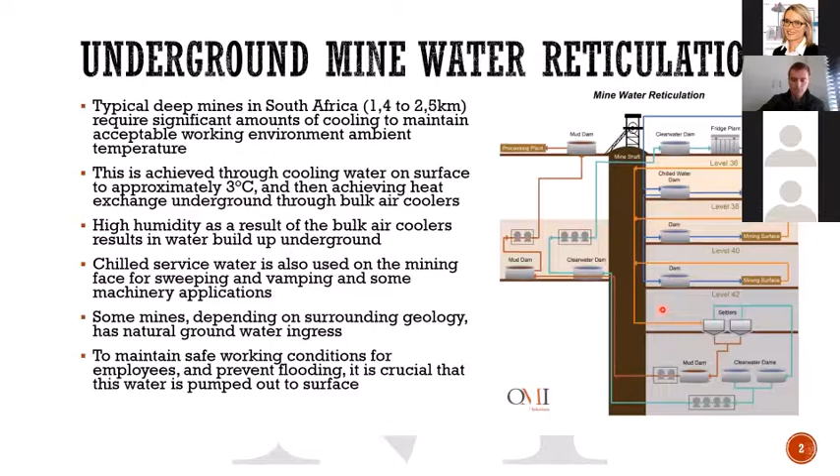And as you return from your mining face, your water is at a higher temperature, as I mentioned, but you also have a lot of solids entrained. The vamping and the sweeping of the face results in very fine solids from the blasting that get entrained in the water, and that also makes its way throughout the system. Now, the majority of these particles are less than 70 microns, so they are extremely fine, but they are from the ore itself, so it has a metal content and rock content, so it's very abrasive. And this needs to be removed from the water before it can be pumped out of a mine.

Now, whether you are just advancing or doing development work, the material you're blasting or drilling will typically be inert. But as soon as you start heading into the phase where you're mining the ore, there you can start encountering sulfide minerals, which actually have the ability to affect the chemistry of the water, and I'll talk to that in a bit more detail further on. When this water with the solids comes down to the bottom of the shaft, you typically have settlers underground, which act as a solid liquid separation. Your clear water then gets pumped to separate dams and then gets pumped out of the shaft.

This is just an illustration of the interstage pumping. Because we're talking about 1.5 to almost 3 kilometers, your pumps typically can't pump that amount of static head effectively in a single go. So you have this interstage pumping, which is another set of dams that you have to handle and maintain. Then your clear water goes back into the system that feeds your fridge plant, and this system continuously runs in a cycle and either gets topped up with fissure water or another water source.

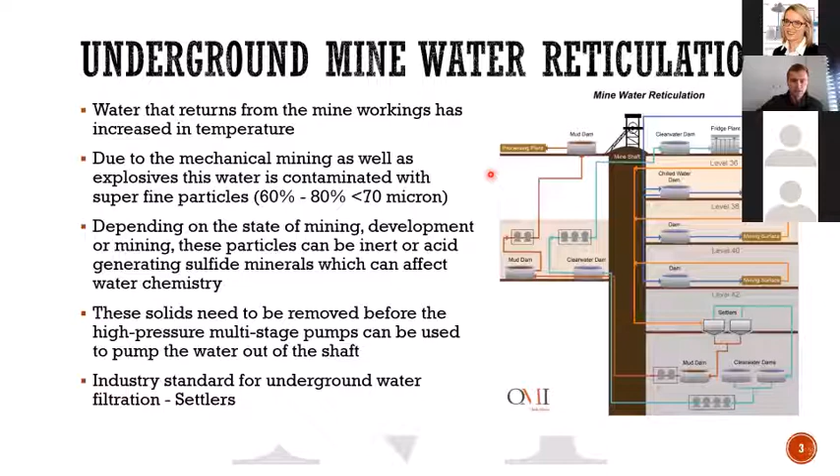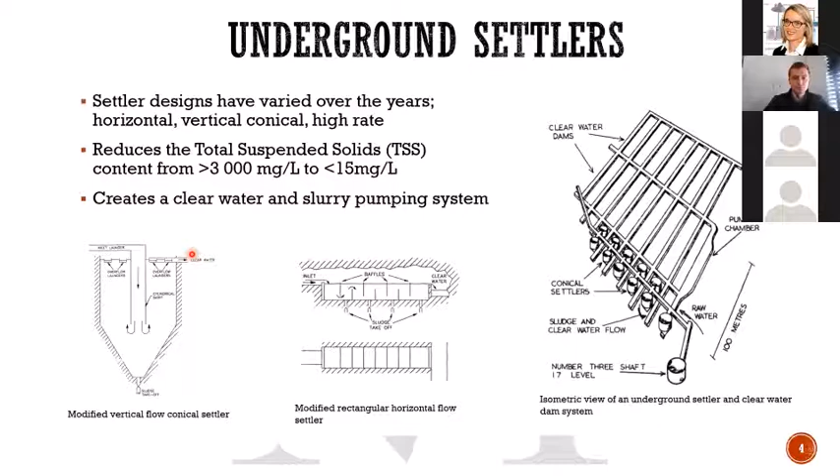So your settler operation is a very critical part of your water reticulation system in an underground mine, and they need to be taken care of, and your settler operators need to know what they're doing to make sure they operate optimally. Then just an illustration of the type of pumps we're talking about for your clear water systems.

As mentioned, they have to pump in excess of 1.5 kilometers, and the volumes can be anything from 300 to 600 cubes per hour, even higher in some cases. So it's really big machinery that's at work here, and they're expensive as well. So a lot of care needs to be taken when looking after these clear water pumps.

And because of this high pressure that they have to achieve, you have to make sure you protect them from the solids. The very fine impeller diameter clearances that they have make them sensitive to these solids. So that's why your settler performance is such an important part in preventing damage to these pumps. Any solids that enter these pumps can damage the impellers, and this will result in reduced efficiencies.

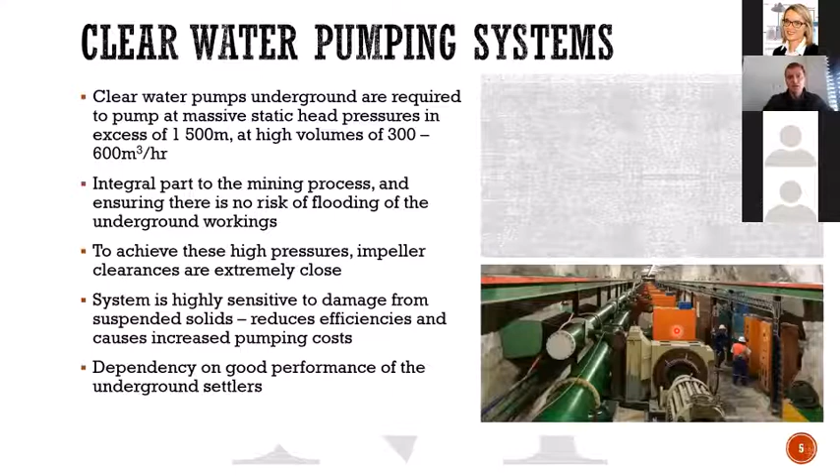And when you're talking about pumps of a few megawatts, any efficiency losses cause horrible extra costs in electricity usage. So you have to take that into account, and it's also important to monitor the efficiencies of these pumps continuously to be able to know when they're reaching the end of their effective lifespan.

So as I mentioned, there's a parallel system, a clear water pumping system and a slurry pumping system. So the underflow from your settlers gets referred to either as your mud or your slurry, which can have an SG of anything from 1.05 to 1.2. Obviously, you want your SG as high as you can feasibly pump, because the lower the SG is, the more the water content is. So that means you're just pumping more water that should have been reporting to your clear water system.

So yeah, as mentioned earlier, this is an extremely abrasive material that you're working with. So there's been a lot of optimization over the years on these mud water systems or slurry systems for them to be able to work efficiently in pumping these solids. Any operational staff will also know that your slurry pumping system is a very high maintenance portion.

So it's important to do your routine maintenance, and equally important to have your standby systems available, because if you have a failure of your mud pumping system, you can't switch over, you can't pump the solids in your clear water system. So if they stop, you have to stop the entire system. So on both sides, your clear water and your slurry water system need to have duty and standby units, because you can't stop your water pumping system at any time. Then you start re-watering some of your sections, and then eventually flooding becomes a risk.

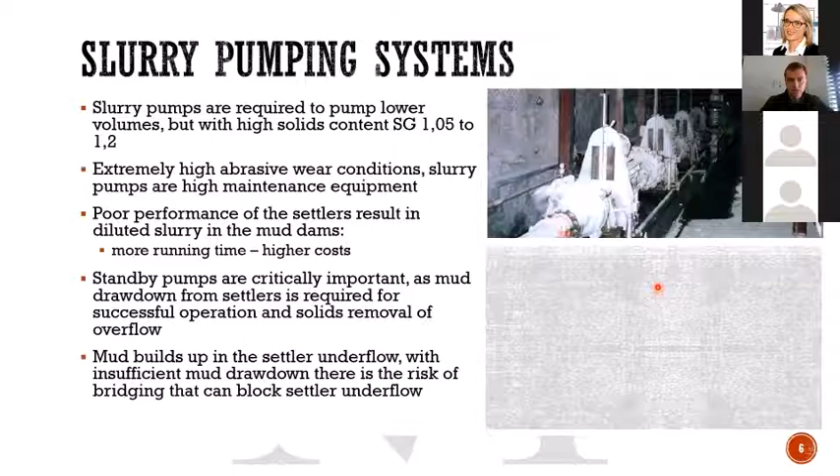So in some instances, the mud pumps are used for draining of your settlers. So they directly influence the performance of the settlers in some cases. If you can't drain the mud from your settler, your mud blanket builds up, and then eventually you start overflowing solids into your clear water, which is again exactly what you're trying to avoid. So as you can imagine, the settlers are a very integral part of this entire system.

And this is dependent on the type of design, whether it's horizontal or vertical, or some of these new modifications that are called high rate settlers. Now the risk you run here is if your overflow weir, which is typically a metal structure, starts failing and it's not completely level, then you'll start causing localized accelerated flow patterns.

So this disturbs your mud bed and has the risk of entraining solids into your clear water overflow. And the other thing that is often observed at the operations is that they overload the settlers. So they would simultaneously take one or two settlers offline for maintenance and then just divert everything to the remaining settlers without actually knowing what their capacities are. And then obviously you far exceed their capacity, the rise rate is too high, and then you just can't achieve settling.

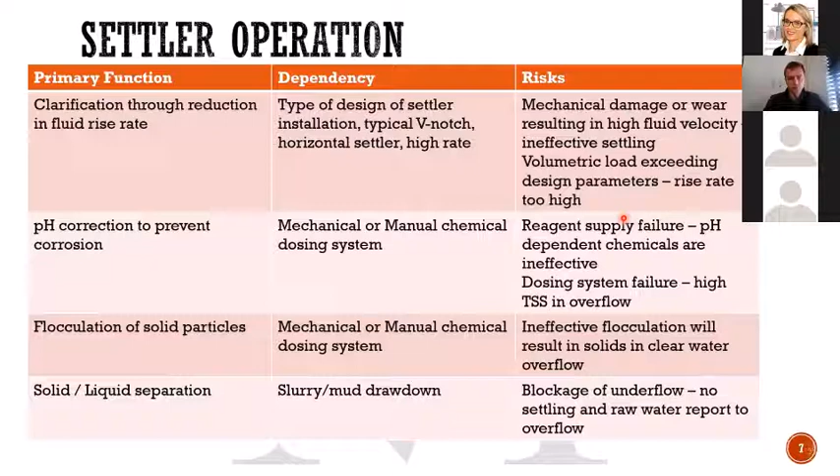So just talking to the actual dams that are underground, they aren't your typical constructed dams that you might imagine, as shown in the diagram here as well. Underground dams are typically underground haulage that's blocked off with a wall and connections for drawing off water, and they are the clear water dams directly after your settlers. So the moment you have a failure of your settler, there's nowhere else for the water to go. If there's solids in there, that's going directly to your dam. So then that will cause silting up inside your dam, which reduces your capacity, but also the risk of entraining into your pumps.

So if a settler is working very well, your suspended solids, that's the fine particles that are still in the water, will be less than 15 milligrams per liter. This water appears clear. With the naked eye, you can't really see that there are any solids in it, but there will still be anything from 6 to 15 milligrams per liter. But if you take into account that you are circulating 10 to 30 million liters a day, that small amount of solids can very quickly add up.

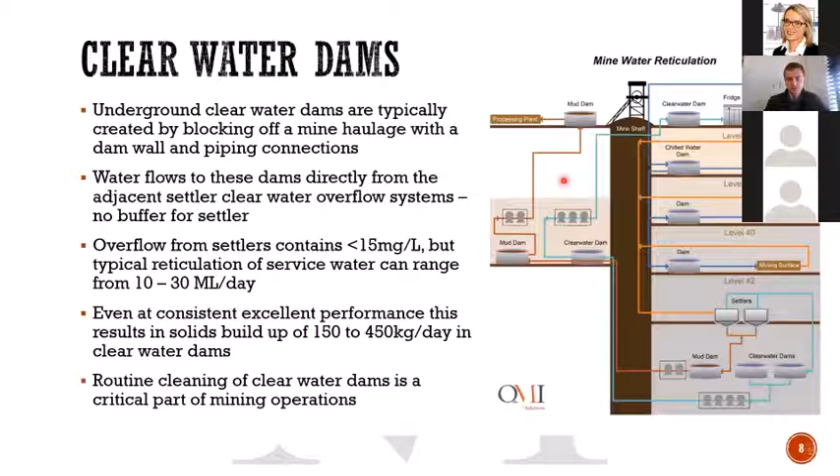So if you just look at that amount of solids in the volume of water you're moving, that's 150 to 450 kilograms per day that's reporting from your settlers to your dams. Now, not all of that is going to settle out in your dam, but you can assume maybe something between 40 to 50% will settle out in your dam. And this slowly builds up over time, and therefore routine cleaning of these dams is also very important. Once your dams become too full of solids, you will start seeing the problems on the operation.

Now, if you are doing monitoring of the water quality you're pumping, you'll pick it up there. Or alternatively, if someone's standing and looking at the water being pumped, they'll see these slugs of solids coming through. Now, under normal conditions, your tank is clean and your settlers are operating well, and your suspended solids is very low. You'll see there's very little fluctuation between the actual settler overflow and the water you're pumping.

But when things start going wrong, when your dam is full of solids, your settler may be operating perfectly, but then you see these sudden slugs of solids coming through your pumps. Now, what happens here is the solids silt up inside the dam and it reaches a critical amount or volume. And then when you stop and start your pumps, you start pulling off this sludge layer.

And then you see these spikes in solids. I've put in some conservative numbers here of 120 to 150. This can be anything as high as 300 or 400, even worse than your raw water, because it's building up over time. So it's very important to monitor the water you're pumping. You can't just rely on your settler overflow and assume everything is working fine.

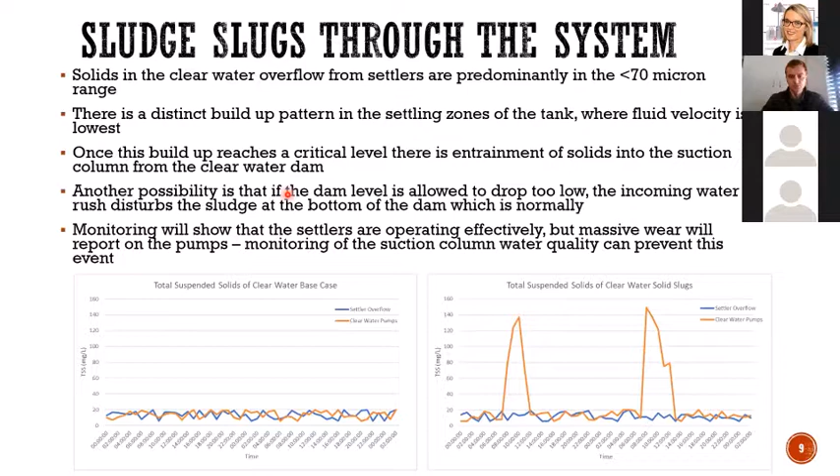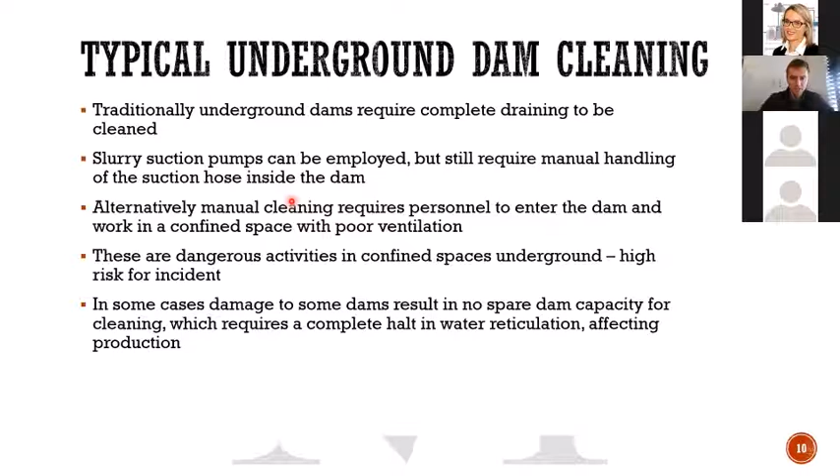As mentioned before, these dams are typically a blocked off area, so cleaning them is very difficult to do. It's seen as a confined space. It's labor intensive. You have to drain the dam, and if you don't have standby or parallel dam systems where you can clean the one and use the other one, this becomes very dangerous. It's very important to try and do this as quickly as possible, because in some cases you actually have to stop mining, stop production to clean these dams, and that's the last thing anyone in a mine ever wants to do, because losses in production, you can't have a higher cost than that.

So yeah, that's a quick run through of how the underground reticulation system works. If anyone has any questions, we'll run through that now. Okay.

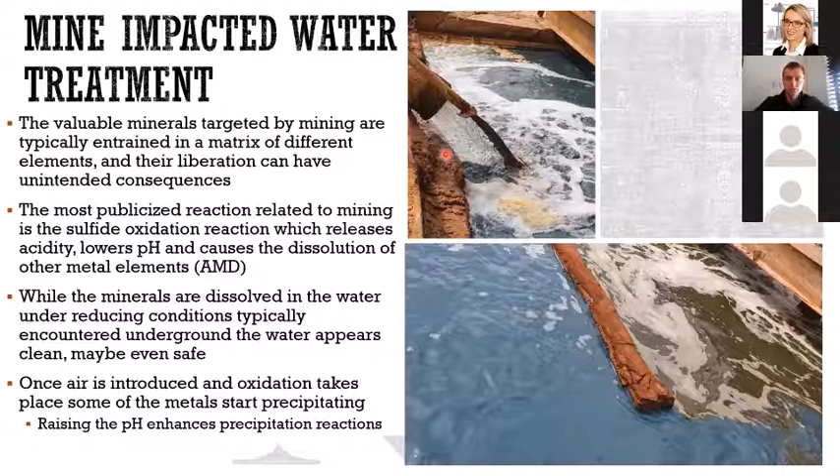So yeah, this just also serves to show that even though water that's coming from underground appears clear, you can't be sure that this water is safe, and it's always best, wherever you have an unknown water source on your mining operations, to analyze the water and to try and understand what is in that water, so that you know whether it can be reused somewhere else or whether it's safe for discharge.

Talking towards the possible value of that sludge. Now, in the first section, we talked about the actual gold that you're mining. The superfines are now reporting as a sludge inside your dams. Where you're doing these precipitation reactions, you're precipitating the actual dissolved metals that were in solution as a solid. And the example here was for a gold mine. You have relatively high concentrations of aluminium, nickel, even uranium that you need to remove from the water

if you want to discharge it, because any time that you want to discharge water from a mine, you have to apply for a license to do that. And this is done obviously to protect the receiving environment, which is the responsibility of government. So government issues you with the license to be able to discharge any water, and then they specify what quality water you are allowed to discharge to make sure that you aren't poisoning or impacting the environment negatively.

So where this is required, obviously these metals would have to be removed to much lower levels. For example, aluminium needs to be removed below 300. So if you're thinking that your limit is 300 micrograms per liter and what's coming in is 25,000, that is a significant amount that you have to remove. But if you have the prospect of being able to selectively recover any of these metals, it might add the possibility of value recovery from these solids.

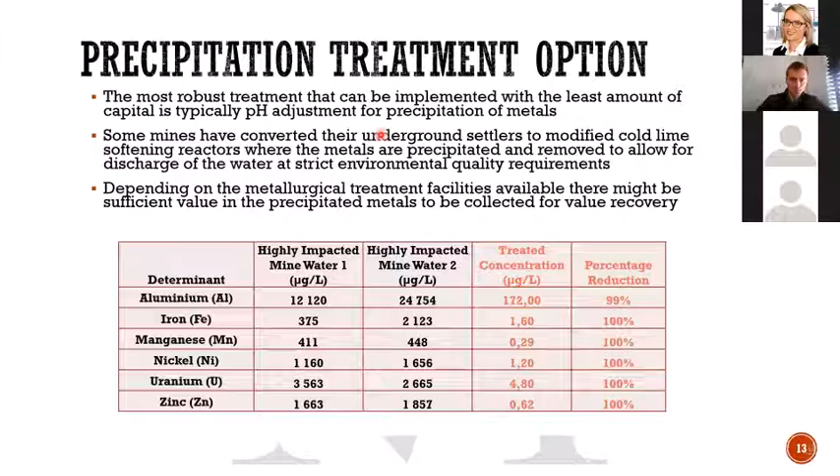Now, as mentioned, this is just where I want to talk to the possible value of getting these materials out. Specifically on your surface water dams, how you would identify where you have a significant solid buildup. Worst case scenario is you only notice it when someone climbs on the side of the tank and sees there's almost half as much solids as water inside these dams, and this is the last situation you want to get to.

So typically what some mines do is they just schedule routine cleaning every 6 months or once a year, depending on the system or the previous experience they have on the shaft. But in cases where you're doing a lot of precipitation underground, your precipitates are even more fine than the solids that you're mining, so they report to the overflow more easily. So you can have much quicker buildup of solids or precipitate in these dams. So you would have to clean more frequently. There are cases where you're doing it every 4 months. So it becomes a very continuous routine maintenance that you have to do.

A way to try and prevent this from happening is to do inspections of the dams, either physical inspection, but if you have big steel tanks, you can also use infrared. Where the solids build up at the bottom of the dam, they don't cool down or heat up as quickly, so they typically report as colder than the actual water that's moving the whole time. So if you inspect the side of the dam with infrared, you'll see a colder, darker layer at the bottom, and this would indicate the solid layer or the sludge that's built up over time.

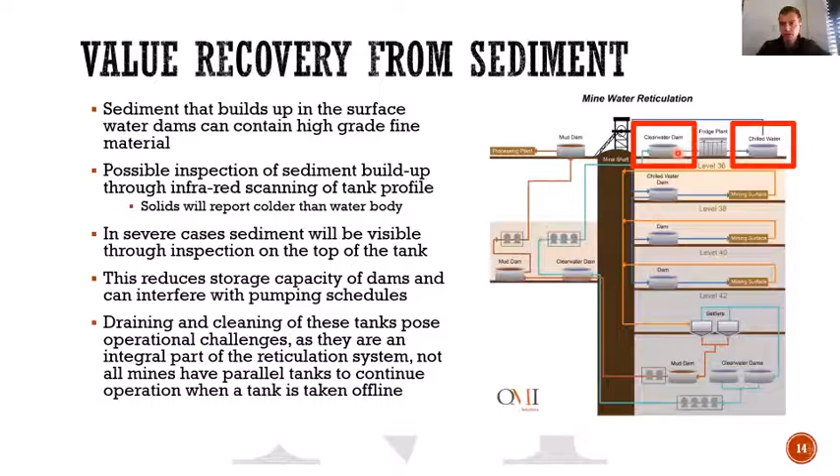So when you've identified that you've got a lot of sludge in a dam that needs to be cleaned, and it's sludge of value that you want to recover, you have a few options of this cleaning method. So instead of actually switching off the dam, draining it, and getting the mud out, something you can consider is online dredging of the tank, where the pump is hanging on a floating system. You can dredge the bottom of your tank and then pump it through a solid liquid separating piece of equipment. The risk you run here is the moment you switch on that dredging pump, you start disturbing the bottom of the dam, which again can cause entrainment of solids throughout the downstream units, which you don't want.

But there are cases and technology partners who've optimized this method of online cleaning, and I've seen that it has been done successfully without having to cause downtime for the system. But once you have this actual slurry that you're pumping out or sucking out with a honeysucker, now again you have to remove it. You're dealing with the slurry. You want to get to a solid product that you can take to your processing facility.

So for the secondary treatment of the sludge, the options you have is either you have a settler, but the settler isn't the complete solution because it's a medium capital, fairly expensive piece of equipment. It's fixed and it only concentrates the mud content up. You still have a slurry at the end as the output of your settler. It doesn't give you the full solution.

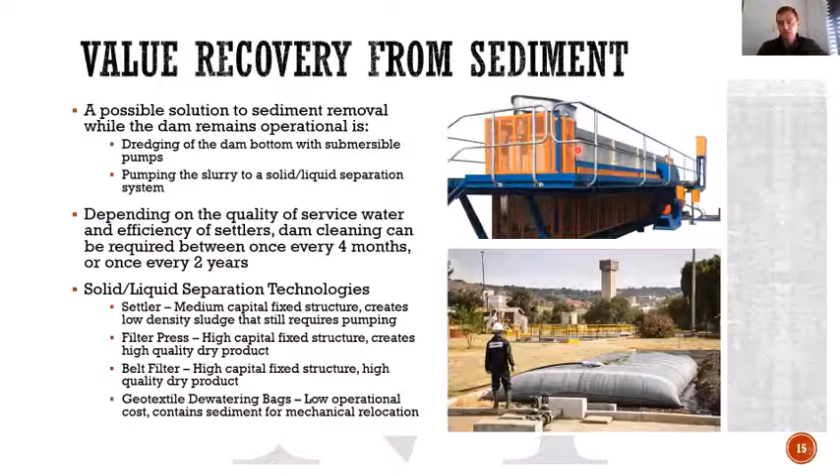The other option is you have these geotextile dewatering bags. The sludge that you're dredging, or that you're getting out with a honeysucker after you've drained the tank, you can pump directly through the bag. The solids get retained. It's easily handleable, so you can pick it up or take it to your treatment facility, and the water just drains out and can be pumped. So it's a more mobile, short-term solution if it's something that's only done every so often.

And depending on whether it's the mine itself or another third party that has a treatment facility for upgrading this material to a more valuable product, you have the possibility to get additional value recovery from precipitates, as well as the actual sediment, which is your raw ore, which is the ore that's just in very fine particles.

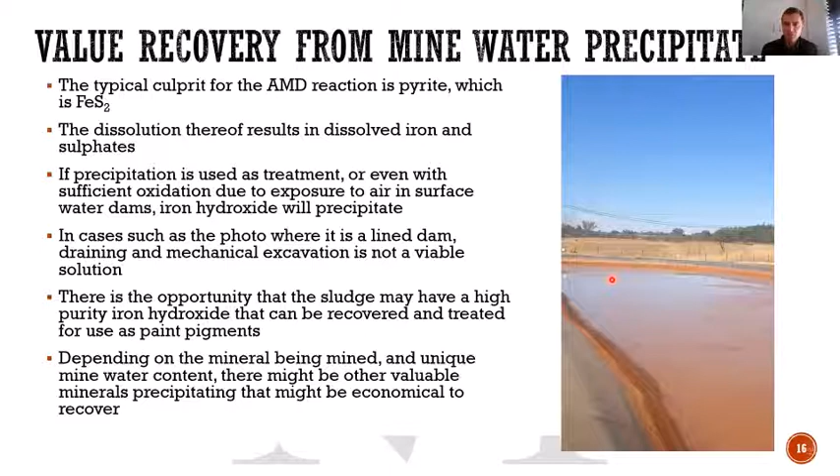So depending on the type of mine you're working at, whether it's gold, PGM, chrome ores, anthracite, each of these types of mines have their unique minerals in their water, as well as the fines entrained therein. So you really have to look at the overall picture to be able to understand where there's potential for value recovery and how the solids in the system will affect your operation.

So basically I just tried to explain how solids in your mine water system will always be present, whether it's in high concentrations or low concentrations, and you have to take into consideration the various effects and risks they have in store for ensuring that your operation works effectively. And there are unique technologies available for every kind of solid-liquid separation, and depending on the application, whether it's continuous or intermittent or short-term solutions, you have to consider all options for achieving the solid-liquid separation.

And I've found in almost all cases there's potential for value recovery from sediments and precipitates, if you look closely enough at how you can recover those minerals. So never just throw away sludge or solids without having a clear understanding of how they got there. Otherwise you might be shooting yourself in the foot.

Are you faced with sediment buildup in dams or liquid waste streams that are difficult to dispose of? ZebraTube's engineered geotextile bags offer fast, flexible, efficient, and cost-effective dewatering solutions. Applications can include dewatering of food and beverage and industrial waste, to dredging and containment of sewage, silt, and natural resources. Small-scale projects can be dewatered using our unique, easily handled 1 to 5 ton bags. Larger projects make use of our tubular bags. In certain applications, flocculant can be added to agglomerate solids to enable efficient settling. Once dewatered, the contained material is dry enough to be easily disposed of or reused. In addition, the filtrate can be collected for reuse. Contact ZebraTube now for your custom-made solution.

So Gerardo did mention quite a few points where the ZebraTube product comes into play, and one of the first things he spoke about is obviously underground. I actually haven't heard those numbers before, Gerardo, so that was interesting to me, how you said even for a perfectly operating settler, you have between 150 to 450 kilograms per day, at best, being sent to your clear water dams. So that is why you ultimately get solids and silt buildup even in your underground clear water dams. And underground dam cleaning definitely has a lot of challenges due to the confined space that you have available.

And so we've done quite a few of these underground dam cleaning projects where you would use the geotextile bags underground, pumping the silt from underground clear water dams into our small scale bag, which is what you saw in the video, which basically looks like a bulk bag format. And we do them either open top like that, or with a funnel top, which prevents spillage if you need that. They come in a 1 ton or 5 ton format, and you can move that bag so easily, which we've seen works very well in a confined underground space,

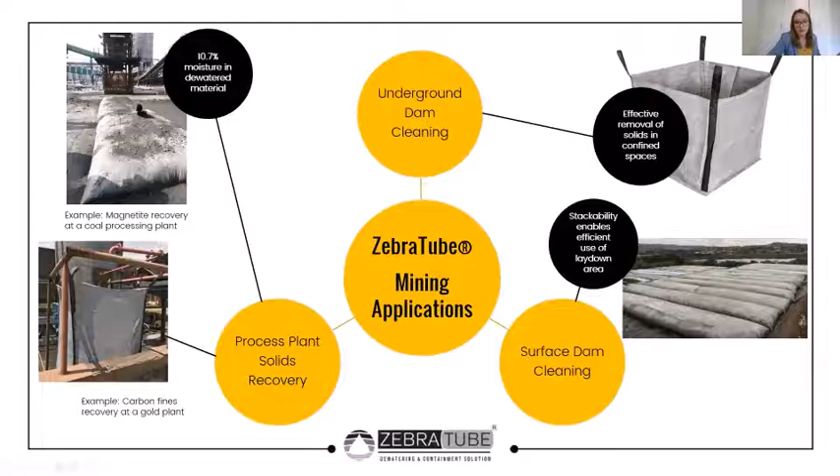Another example that I know Gerardo is also familiar with, because it is a gold application, we commonly utilize the square or smaller scale format dewatering tube in the carbon fines recovery on a gold plant. Carbon fines typically contain quite a lot of gold still that needs to be recovered, and this is another good example of a very cost-effective way to recover the water and then contain the carbon fines. And because of the format of the bag, it's so easy to then come with a forklift and just move it as is to wherever you would like to process it in the process plant. So that is just a very, very quick overview of ZebraTube and where we fit in.

I think I will now take some questions. If there's any further questions on the ZebraTube specifically, I just want to open my chat box.

Okay. So I know Birgit asked earlier, what size geobags would you recommend to pump the sludge into? So that's a very difficult question to answer because it's so application specific. And the nice thing about ZebraTube as well is we're very flexible in terms of the sizing that we do. So we do custom design based on whatever your requirements are. So in order to get a sizing for whichever sludge application you have, I would typically say contact ZebraTube and we will do a sizing calculation according to your requirements.

And just to give you an example of where we've done some custom sizing, also in an underground application, we've done bags that fit exactly into the hoppers for the underground earth moving equipment so that people can pump and move it directly. So that was another example of where, according to the context, we would then size and design according to whatever the requirements are. I hope that answers your question, Birgit.